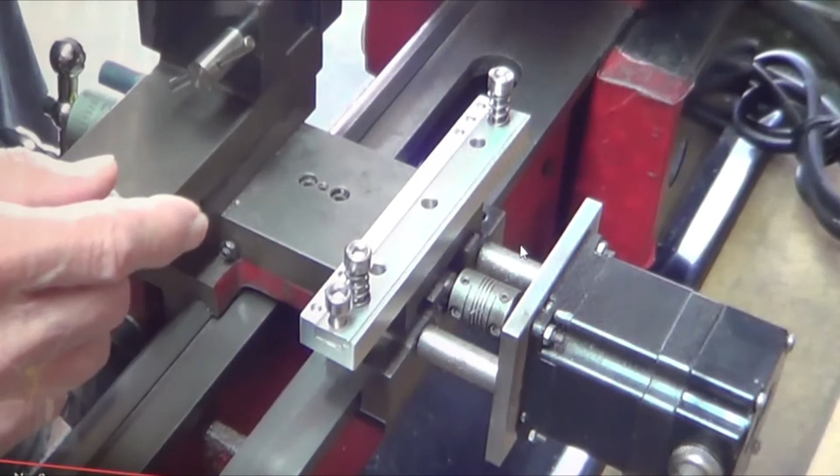Alright, this should be a good spot in the video to freeze it, to explain what I'm discovering here. This plate is bolted to the bottom of the saddle, and this spring is doing 2 functions. One, it's pulling this bottom plate and the ball bearings up underneath the ways. The second thing it's doing, because this is bolted to the saddle, it's pulling the saddle down against the top of the ways. So now when you start machining up here, the force is down, so you're pushing this edge here down. Well, this has already got contact on the top surface of the ways, so it's not going to move at all.

You might be squishing out maybe a half a thou worth of oil that's in here, but this is not going to move. Now this side, again, this plate's bolted to the bottom of the saddle. The spring is pulling the saddle down and pulling this plate and the ball bearings up against the bottom. Again, when the force goes down, this end of the saddle is going to want to raise up. So if this bolt is not tightened down, this is going to move up.

So I'm sure the function of this is once you get this in place and adjust whatever spring tension you want, you need to crank this cap head screw down till it's snug. Now you can't raise the saddle, because it's going to try to bring the bottom plate and ball bearings up with it, but this screw keeps it down. That's my understanding of this. In the earlier video I showed the front one and had it backwards - this screw should also be over here, lined up with the groove for the gear. I had it in the wrong spot, way over here. If you turn it around, it actually lines up in the right spot. So that's my understanding of how the saddle clamp, or whatever you want to call it, works.

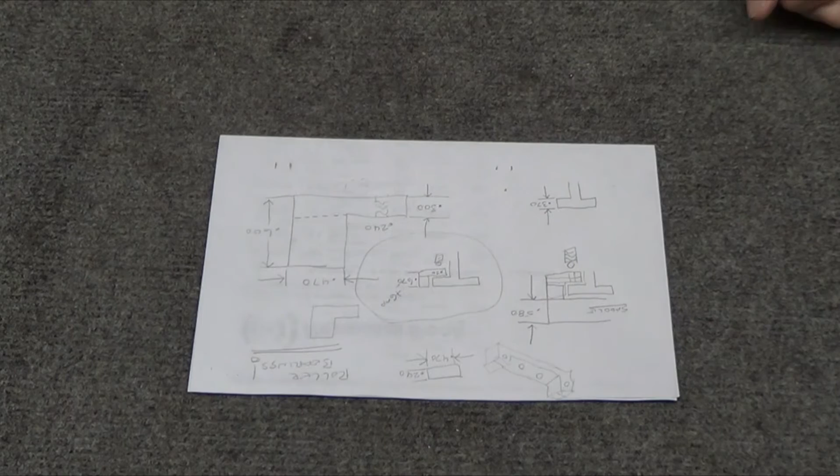Alright, hopefully everybody can see this, and I may have to pause because the Blue Angels are practicing here right over the house for an air show tomorrow at Miramar.

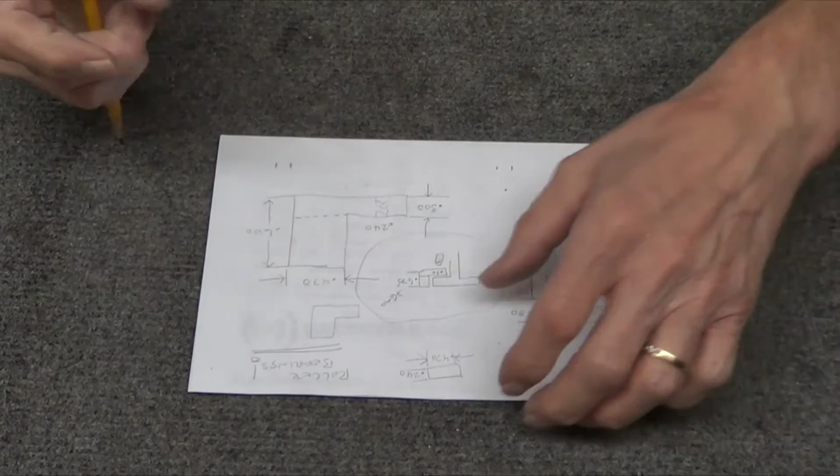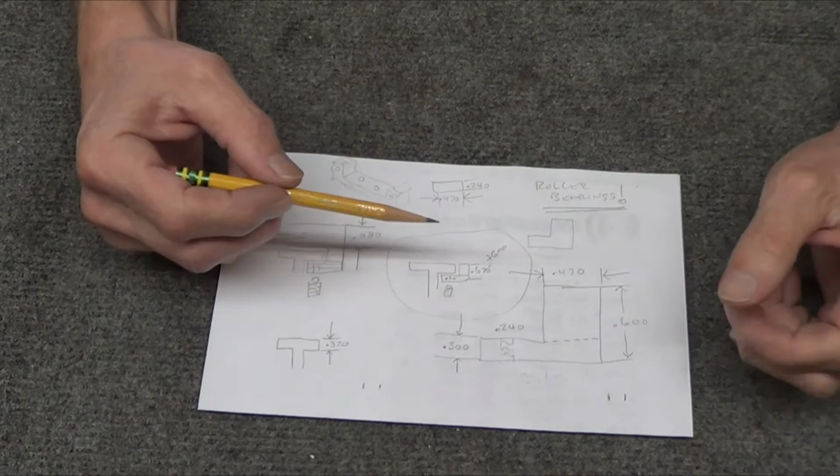But I kept thinking about the eBay one and what I could do to solve my problem. I was thinking, let me turn this over so you can see - this would be the actual way. So I was thinking I want to make something that just goes here, and then I can put a set screw in here with a ball bearing. I've ordered a couple different size ball bearings off Amazon, a 16th and an 8th, and I probably just need the 16th, but I can just thread this thing and come up here.

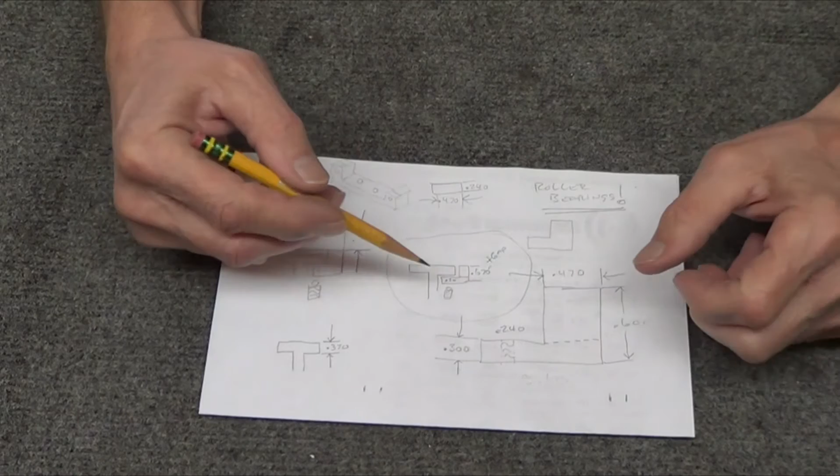You can use all kinds of different set screws - I know there's ones you can buy with a nylon insert. I've made some of my own, like for the Harbor Freight Arbor Press, where I drilled it out and put a little brass pin in there. So there's all kinds of possibilities to this, but this doesn't solve my rocking problem.

So what I came up with is this. And this is some pretty crazy machining, let me tell you. I used that new cutter I had demonstrated, and it just went through this like nothing - no chatter, beautiful surfaces on this. It's like, geez.

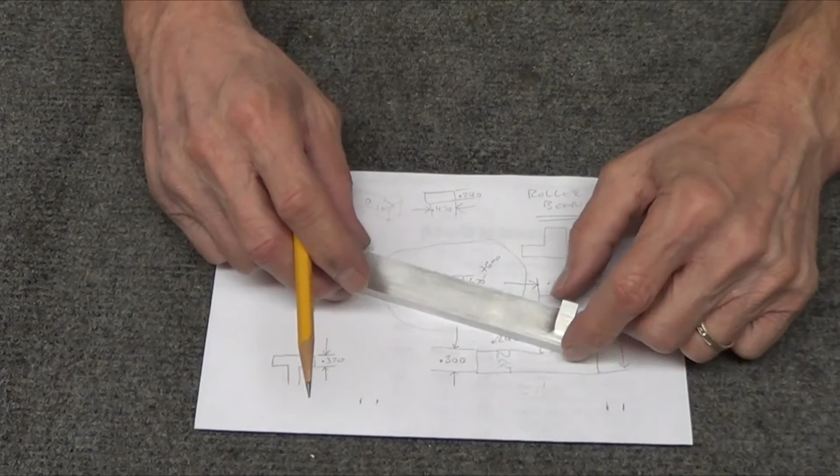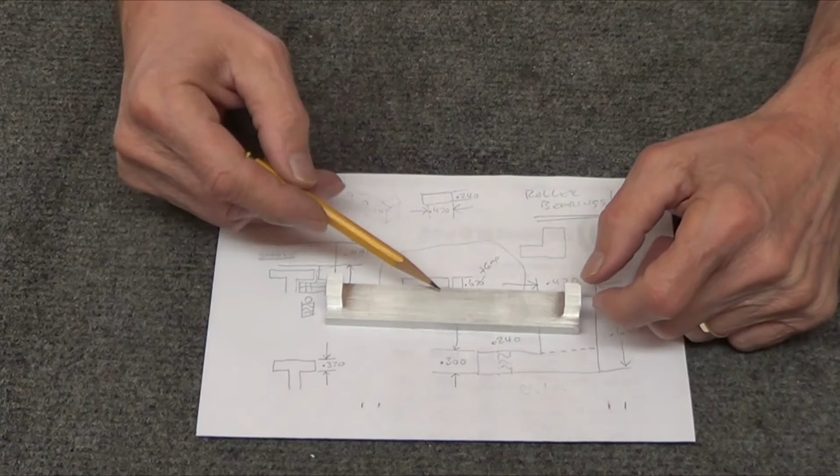But you can tell where this goes - the saddle sits in here, and the actual bed's going to be here. I haven't made the 3 holes yet to screw it to the bottom of the saddle. I may have to put some spacers in here, washers or something, so I'll have a bit of a gap underneath the ways. Then I'm figuring I'll make a hole here, or thread a hole for a set screw, on this side too, and that'll take care of this, which really isn't my problem.

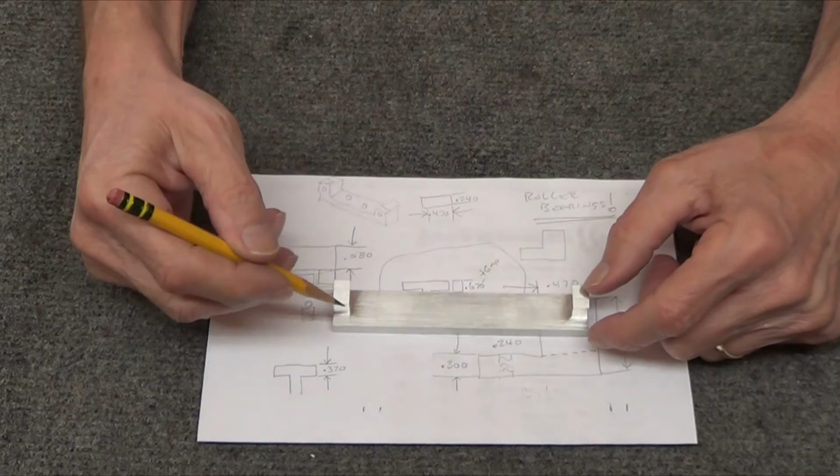But I'm going to drill through here with the same setup - set screw with a ball bearing - and then just jam this up against the back of the way and tighten down these guys. That is definitely going to improve that problem. I don't know if I can jam it far enough to wind up with zero play on it.

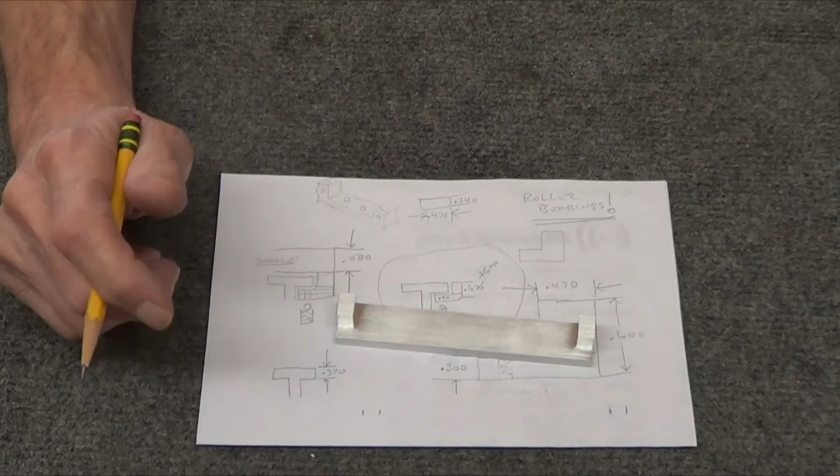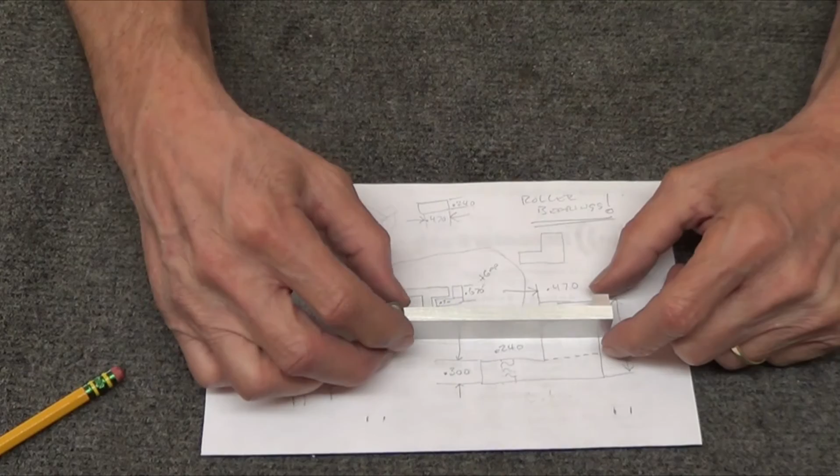But some of the other thoughts I had was, if you really want to put that there, now you can tighten this thing up against the bottom of the ways as much as you want, and it's not going anywhere. So this could be shortened and that can be put in place. It's an option - I'm probably not going to do it at this point, but that could be a cool thing.

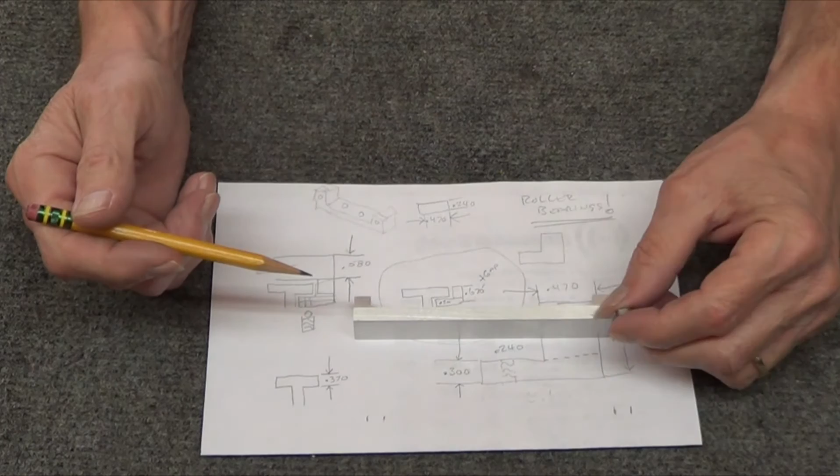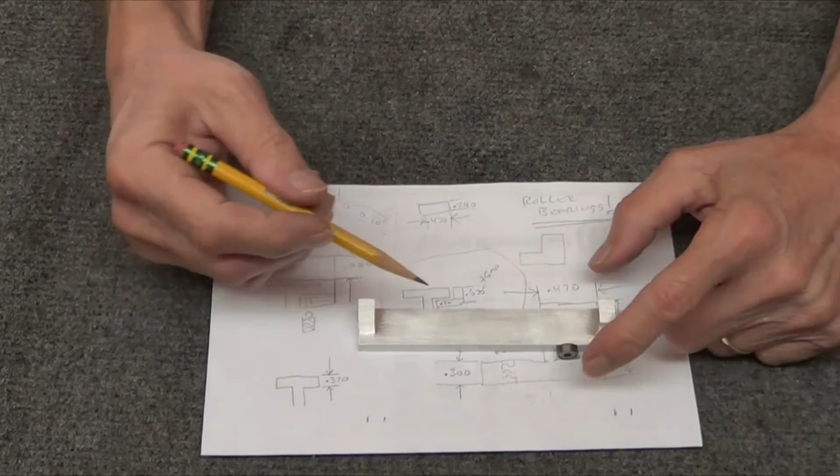These were dirt cheap - I think you get like 10 of them off Amazon for $5 or something like that. The only thing I was concerned about was, will chips get underneath here? I don't think they will, but you can always put some plastic or something along the back to keep this clean. So if anybody's got this kind of saddle doing that rocking, this will get rid of it. Putting them this way, it's a possibility.

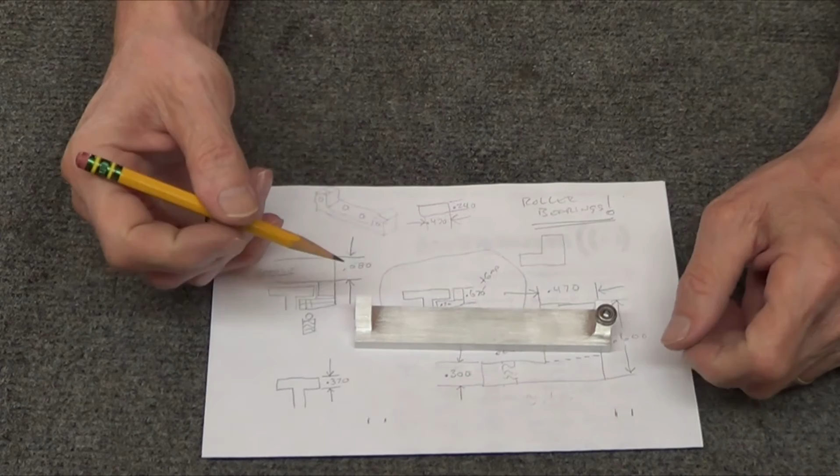So the same kind of thing. For now, I think I'm going to just build this using the ball bearing kind of approach and see how it works, because I'll still have enough material that I can actually tear out the set screw and replace it with this.

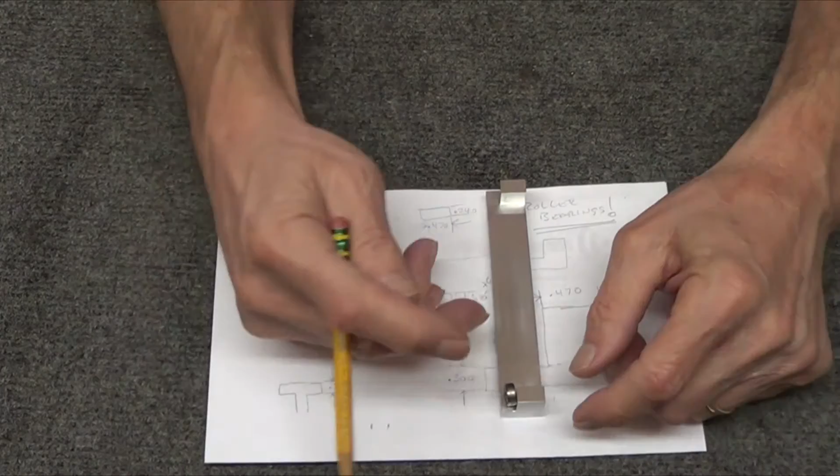So the set screw is going to come in underneath, right? How much room is there on this? Oh yeah, so I'll be able to clear that out and replace it with this if I don't find those working that well. I'm figuring you bolt this up under the saddle, and then you can run the ball bearings with the set screws up until they're tight.

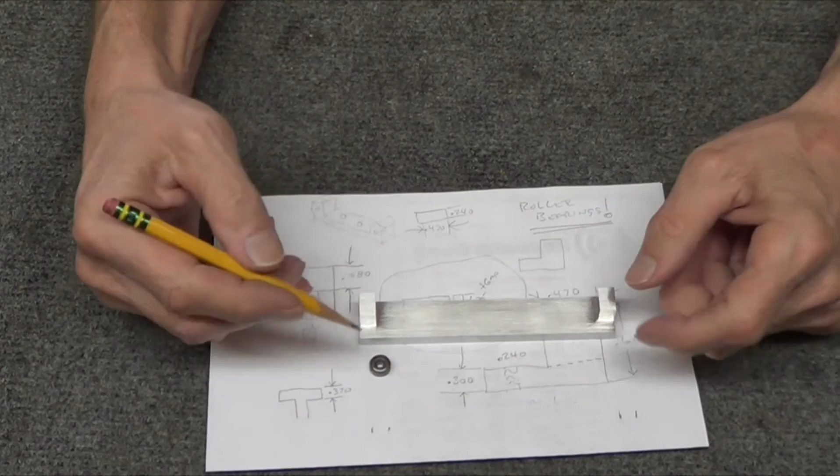Same way with this. You kind of just stick it up against the saddle, and then you can run the set screws in and just completely get rid of this. The ball bearings, hopefully, I'm not going to have that much friction at all. So this is just kind of where I'm going with this idea. Alright, I think you can see it underneath here.

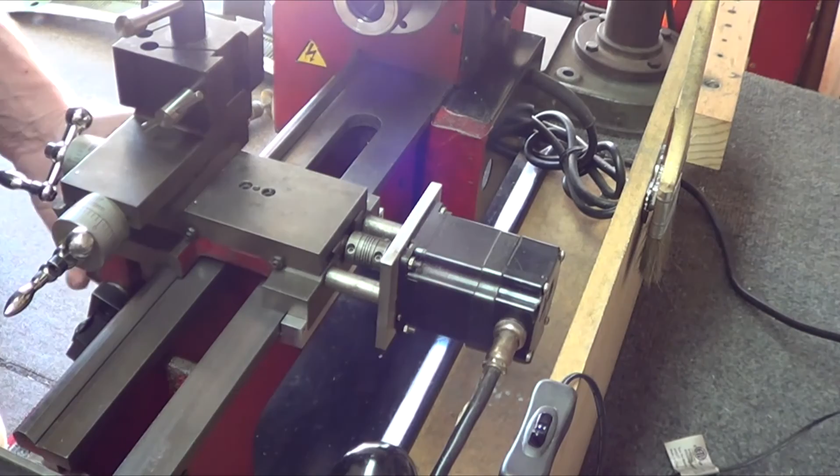I had set screws that already had the cups in it, so these are 4mm with 1/8 inch balls. I just dropped them in there and tightened this down, and there's no movement anymore. I don't see anything happening here. I haven't bothered to drill and tap the holes on the bottom for set screws down there. I'm just clamping it like the old plate was, but this works, guys.

And this back edge, it's a little rough, so I'm not sure what's going to happen or how, but this is far, far better than what I had before, and it's fairly easy to machine. So there it is, guys.

Alright, sitting out here in the shop, just playing around early in the morning. Nothing to do, but...

Gas ran out in the lighter last night, and I was thinking - I saw a video not too long ago of a guy, a video about like 3 great inventions or something. He took this piece out of the lighter, put it on a mandrel, put it in a Dremel tool, and made a grinding thing out of it - a grinding wheel or something.

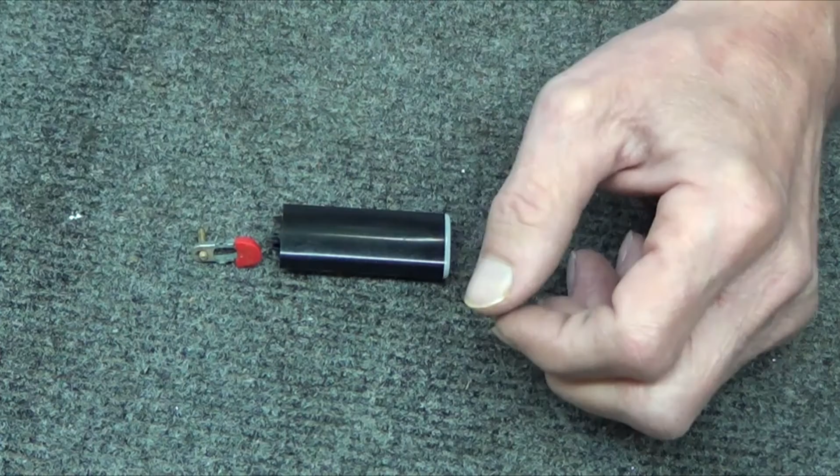And lo and behold, here's the thing. Yeah, it's soft, so I guess you've gotta somehow drill it out. Or no, a pin is pushed in there, looks like.

But underneath over here is a nice spring, and underneath the handle, the part that you push, is another spring - and these are pretty tough too. So rather than throwing these lighters away, I'm gonna start taking them apart and just save some of the springs from them.

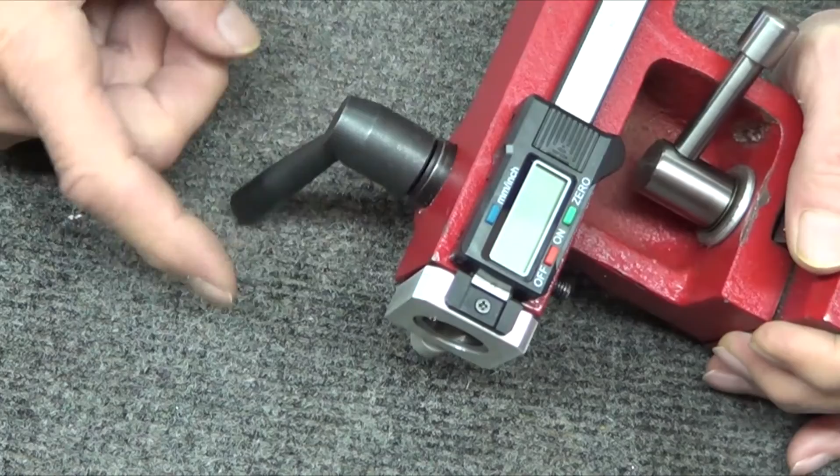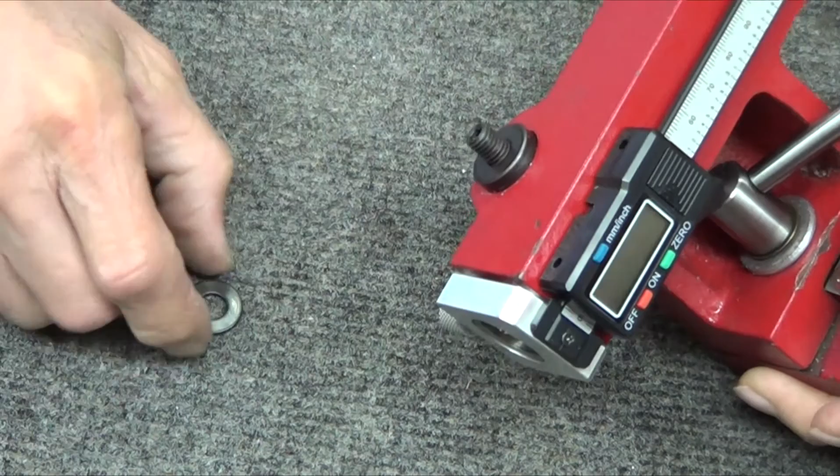But what got me was, I don't know if you guys remember, in one video I had put these to the side so I don't lose them. I got tired of this thing flopping around, so I had drilled a small hole in here someplace. There should be a spring in here somewhere. Where did I drill it? There it is - oh, that's a long spring.

But I had taken this out of a pen, and it's just not umphy enough. I was thinking it was smaller - if I used that, I probably should have drilled a really small hole if I'd had this spring and put that in there, because this has got a lot more force to it, right? Oh yeah, quite a bit more by comparison. This is like wimpy.

So I guess I just wanted to share that. If you guys are looking for small springs or just to add to your collection and you use lighters, don't throw them away - just take them apart first and save whatever parts are in there. So I just thought I'd share that.